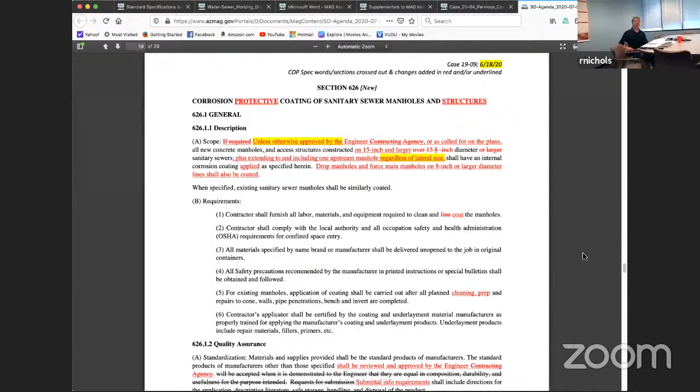I know that we're looking for possible action today, but if you want to walk us through this one last time, that'd be great. Okay, yeah, I just did some minor updates that were brought up at the last meeting, and you can see just the ones that are in yellow. That was what was discussed, and we added those in.

We discussed it at the working group meeting on the 23rd of last month, and we didn't have any further discussion or comments, and I didn't get any other comments otherwise. So I think this wraps this up, and I know I asked for a vote last time. So I'm ready for a vote right now.

If anybody else has any discussions, we can talk about it now if they want. Are there any questions from the committee on this particular section, or any other discussion items on it? Okay, doesn't sound like it. So let's go ahead and vote on this case then.

We'll need someone to make the motion and a second before. Okay, this is Carl. I'll make a motion to approve it. This is Warren, I'll second it. Okay, excellent.

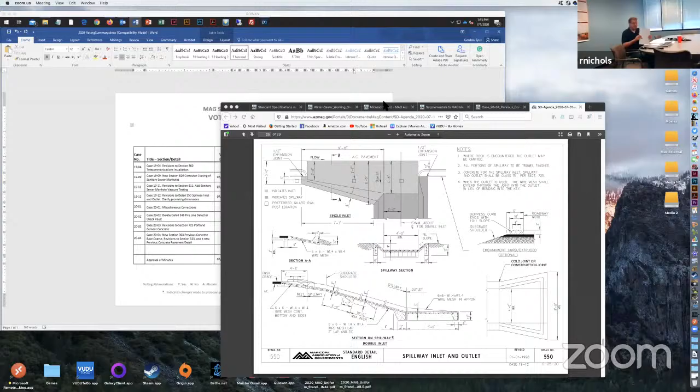Okay, moving on to item number 8, case 19-12, revisions to detail 550, spillway inlet and outlet to clarify geometry and dimensions. Carl, you'll give us an update, and this is on the agenda today for possible action. So you can walk us through any of the final changes here, and we'll open it up for questions or comments.

Okay, this detail 550 started out where one of our surveyors had a hard time laying it out because the dimensions, the key control points, wasn't clear on the geometry. So we cleaned that up. We gave it very, very distinct dimensions to the certain corner points. And there was one comment about one of the dimensions not matching the one below, and now it does. It's the 4.8. The 4.8 there matches the one on the section on the spillway down below. There's a 4 - I think it used to be 3.6, just under section AA. Yeah, there it was 3.6. I fixed that to match.

And the other thing was on the spillway section, there was some concerns about the erosion getting over the lip and underneath the spillway section. So I added a 12-inch by 6-inch cutoff wall, which I think is good construction for just about anything we do, especially in this desert where we don't have vegetation taking hold and there's quite a bit of erosion. So I added that. And then the other thing was changing the designation between the inlet and the spillway by using shading, which I think is more common with the drafting we do these days. This last revision was last revised in 1998, that might have been before we had the CAD type of tools we have to really distinguish, using the shading. And that was about it.

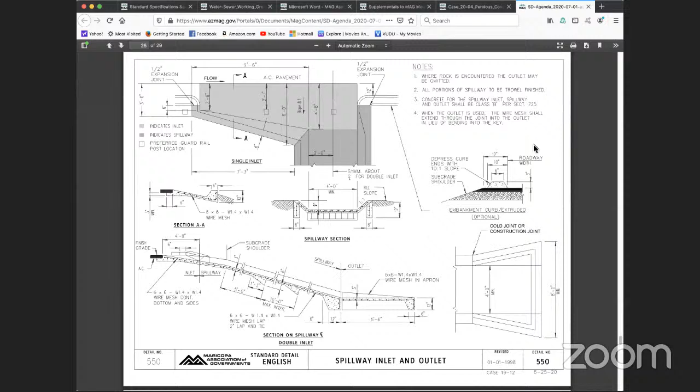Any discussion items from anyone else? Questions, comments?

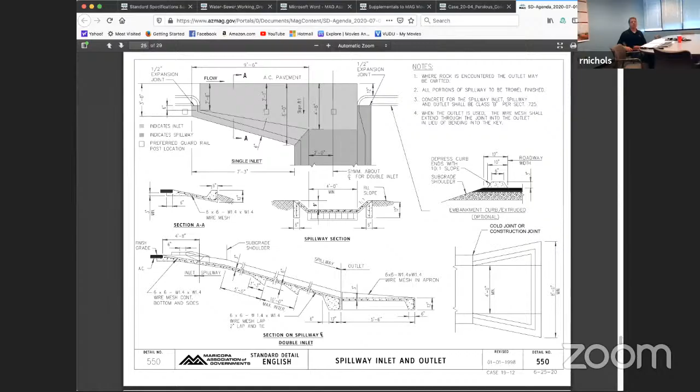Okay, do we have a motion or are we still looking at it? This is Dave Mobley, I'll motion. Okay, we've got a motion to approve the case. I'll second it. Thank you, Warren. Any other discussion? That was Jim.

Should we go into the roll call? I believe Jim seconded the motion. Oh, Jim? Okay, Warren's name popped up, but it sounded like Jim. Fair enough.

Avondale, yes. Buckeye, yes. Chandler, yes. I'm calling out the people that aren't here anyway, just to give them a chance in case they join in. El Mirage, Gilbert, yes. Glendale. Goodyear. Maricopa County, yes. Mesa is a yes. Peoria, yes. Phoenix, yes. Scottsdale, yes. Surprise, yes. Tempe. Youngtown.

Okay, thank you everybody. Unanimous on that one also.

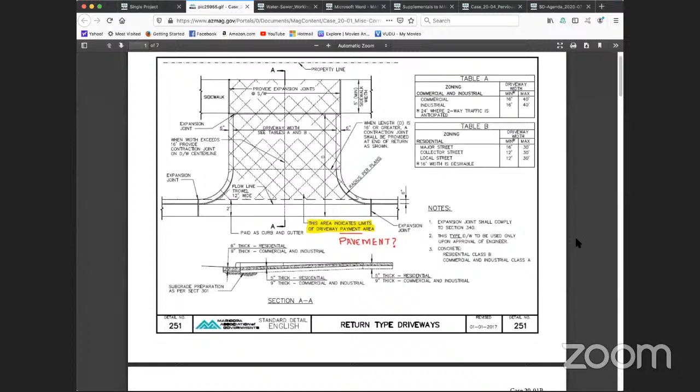This is Carl. Is it a pay item or a pavement item? Yeah, I think that's a good question. The way it's phrased now is 'payment area.' And if we change it to 'pay item,' we can drop the area - it's just 'driveway pay item.' I guess you'd still leave the area, 'pay item area.' I think that's the more common terminology, makes more sense to me at least. Okay, I agree.

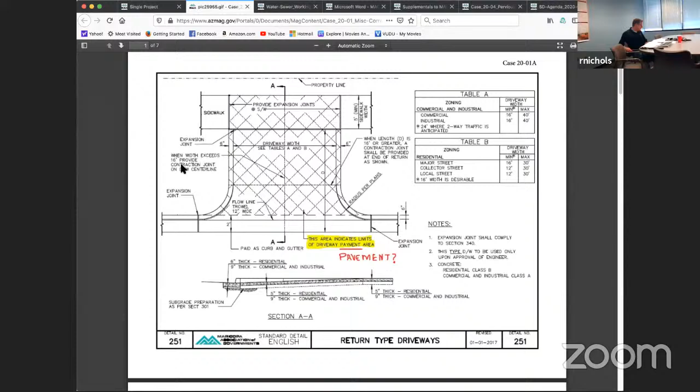I think item F on this list - is this a new item? The weld beads on detail 393? Yes. Okay, can we discuss that and talk about what's proposed here?

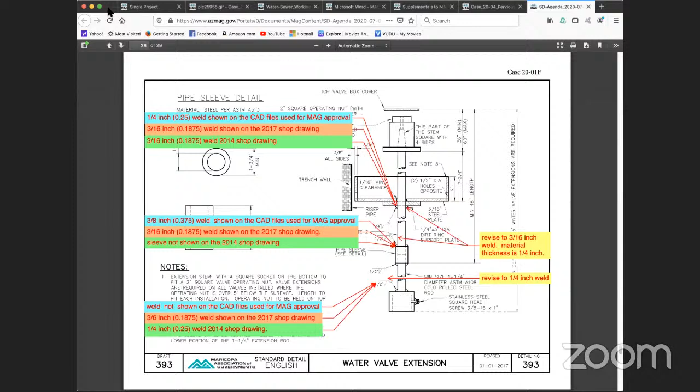Sure. This is actually proposed by Craig Sharp. He was taking a look at this detail and first noticed that the welds for this little sleeve are currently showing 3/8 inch, but the sleeve isn't even 3/8 inch, so you can't fit the weld in this area. He looked at one of the manufacturer's detail drawings from Oldcastle, and they're using 3/16 inch. This sleeve did not exist on the previous detail, so at some point when it was added, the welds probably were not sized correctly and need to be corrected. He's suggesting they become 3/16 inch to match the manufacturer's fabrication detail. Also, comparing it to the earlier version shown here in green, the earlier version had a 3/16 inch weld here that got changed to 1/4 inch, and on the bottom it used to be 1/4 inch and got changed to 3/8 inch.

So somewhere along the line, these also got changed from the previous drawing, which could have just been an error when it was copied over. I don't know if people were specifically wanting to change those, but they were just adding the sleeve, so there's some confusion on that as well. I think he went back to the previous drawing and is recommending to use the 1/4 inch on the bottom instead of a 3/8 inch, and the 3/16 on the top, which is what they were using for the current shop drawing and what was used in the past.

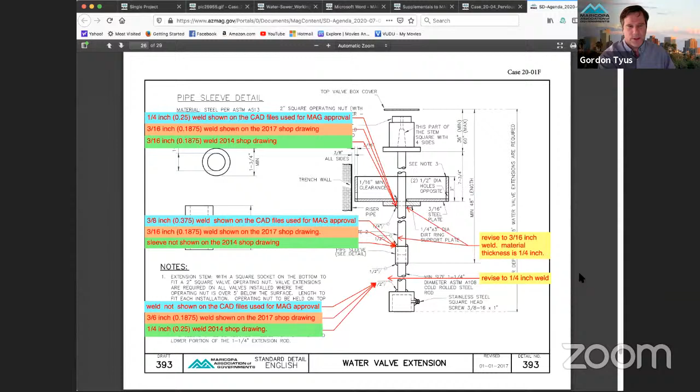Right, I think that was where he was coming from. There was some discussion about that in the working groups on whether it should be a separate case or a blooper. At the time, Craig and Jim, I believe, thought that it was simple enough that it could just be a blooper case.

Are there any questions from the committee on this particular case, or any comments? Okay, are we okay leaving it in the miscellaneous corrections? Anyone have concerns with that? Okay, hearing none, then I would propose we have it continue forward in that path.

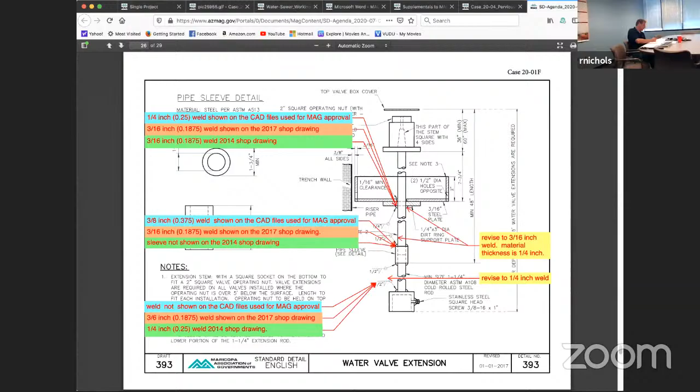Item number 10, case 20-02, which is to delete detail 346. This was the fire line detector check vault, which is typically no longer used and refers to outdated manufacturers and details. The recommendation is to delete the detail in its entirety.

I think we've had multiple discussions on this. Warren, I don't know if there's anything for you to update us on, or if there's anything else we need. No, I have no updates, I have not received any comments. I think we're ready for a vote.

Okay, is there anyone on the committee that has a question or would like to discuss this further? Okay, so we'll propose this for action for the next meeting then, for possible action in the next meeting.

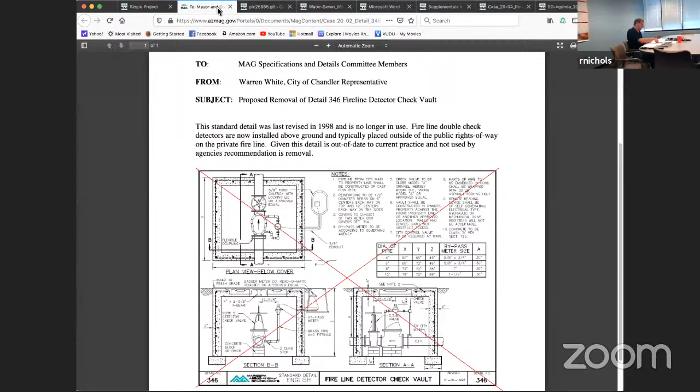I think it was mentioned in the minutes that it's for action this time if we wanted to vote on it. Oh, okay, is that correct, Gordon? Warren, it may have been, but I didn't put it on the agenda for action today, so I'm sorry we can't vote on it today. Oh, that's fine, that's fine. Thanks. Okay, well, let's get it on the agenda for the next meeting and go from there.

It's a simple change, so if it gets voted to be removed, it'll be a quick change. So I think if it waits till next month, it won't hurt anyone's feelings too much.

Just trying to increase your accomplishments, Ryan. Yeah, thank you, my short watch here, we got a lot done. Yeah, it's been a good day.

Okay, item number 11, case 20-03, revisions to section 725, Portland cement concrete. The last update was quite a few months ago. This is update language referring to low alkali change mix design submittals to 2 years, to modify mix maximum temperature and time limits, and correct some spellings and typographical errors.

Jeff, do you want to walk us through any recent discussions or updates? Ryan, I think you did a great job. Thanks. We did discuss this at the working group meeting last week. I did go over it again as Ryan just did, chapter and verse, line by line of the various changes.

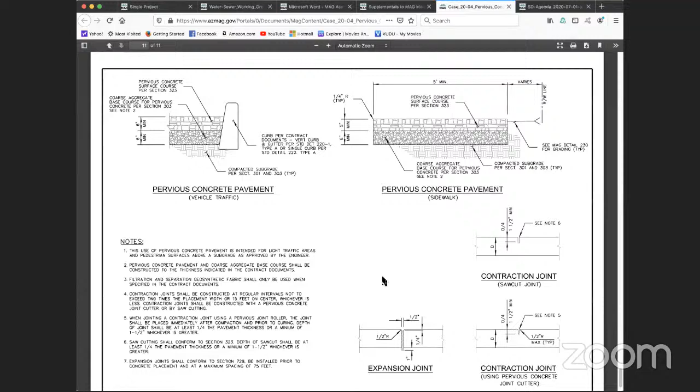And again, I would just ask you guys, get it back to your groups, let them give it the once over, and I'm sure Roy would be interested in moving this thing forward. We would really like to, I know that we just submitted it, but we'd really like to make this move forward this year and not carry it over to next year. And I think that's very doable. Oh, I didn't mention, thanks Gordon for pulling that out. He did also put together...

A pavement design to go into the details section here. Really basic, just to try to give people an idea, a generic kind of application that could be used so that it gives people an idea of how it should be done. Obviously in some situations you're going to have to do some additional engineering, and some of this would not be applicable, but keep in mind our aim is to make this pretty generic and relatively easy to use for a lot of light traffic pedestrian areas that could be utilized quite easily.

This material, certainly something like a large park and ride with various different kinds of traffic and so on, would need to have its own engineering done and would probably supersede this in the first place. And this is Peter: part of that was to provide some minimums that would be recommended. That wasn't meant to be the final design, but to establish minimum levels.

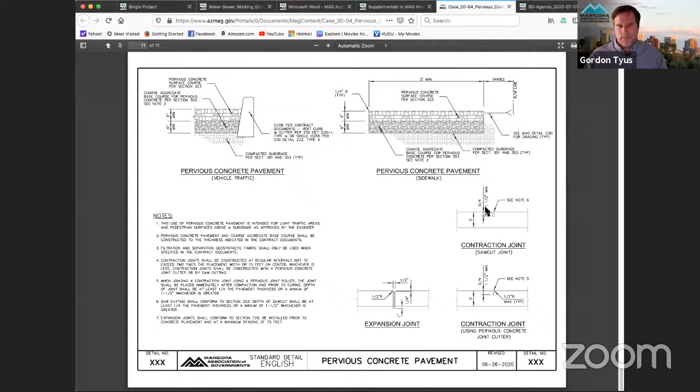There's at least 3 major park and rides in the Phoenix area, and bits and pieces all over the valley. Glendale has one at Glendale Avenue and the 101, which is the oldest in the valley. Scottsdale's got one in the northeast area, and Tempe did one also, where you can see some of the pervious already down. I think there's a new one in Peoria too, the latest one, and they used a different aggregate underneath the pervious itself.

We don't have Glendale's representative, but Glendale's the oldest one, close to 10 years old. If you wanted to see how it's holding up, that would be a good one to go look at. Being a park and ride, the actual parking areas where vehicles park is pervious, but the main lanes down the center where the transit vehicles travel is conventional paving. There's quite a bit of pervious for where most vehicles park, and it's had minimal maintenance costs. You might touch base with someone at Glendale about it. I think they've done minimal things on it, and it's done really well.

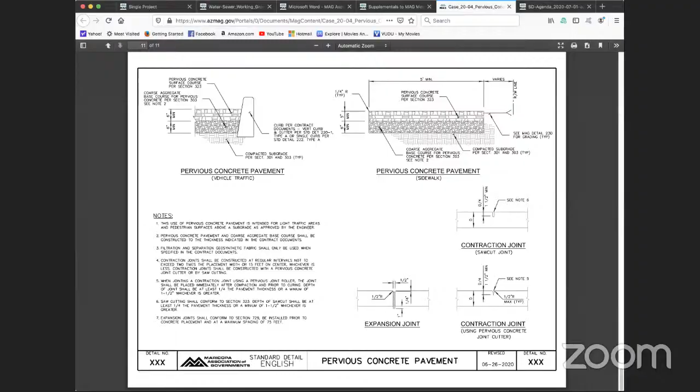Is there a proposed detail number for that detail yet? I don't believe a number has been decided yet. I'm not sure who makes that decision. Is it Gordon? We'll have the case sponsor make a recommendation, I guess. We should probably look at the existing details and see where we have some other asphalt sections, and find a number that's open in that area.

Any other questions or comments or discussion? Was this going to be in the outside right-of-way section? No, it's going to be in the main section of MAG, Jim. Just like there's 2 sections we did a couple years ago that are in there.

I'm looking at the details. Maybe 225, which is the pavers, maybe somewhere between 225 and 230 might be a good place to put it. 230 is sidewalks, as far as the detail number goes.